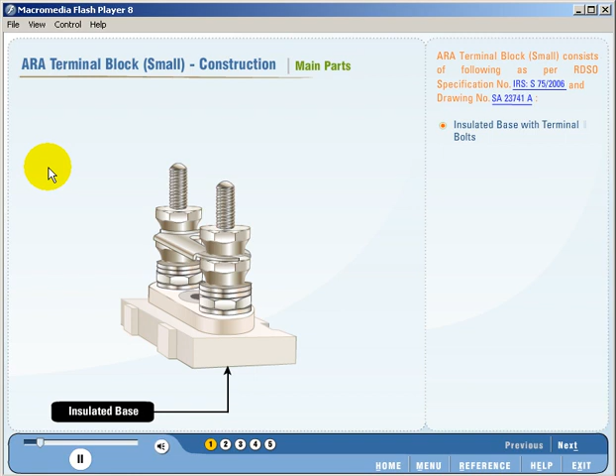ARA terminal block small consists of insulated base with terminal bolts, clamp nut, binding nut, washer and link as per RDSO specification number IRS S75 by 2006 and RDSO drawing number SA 23741A. Click on the menu and select required topic.

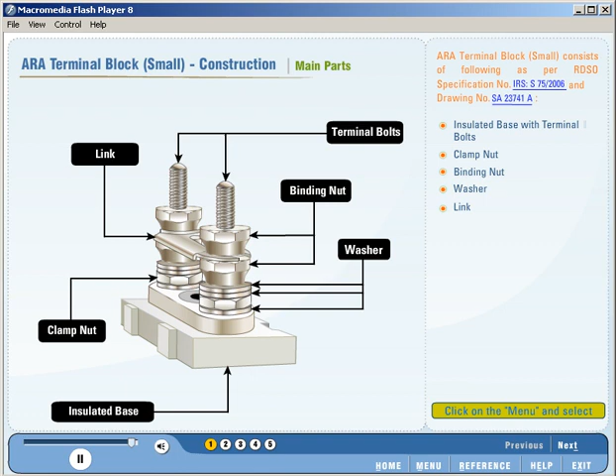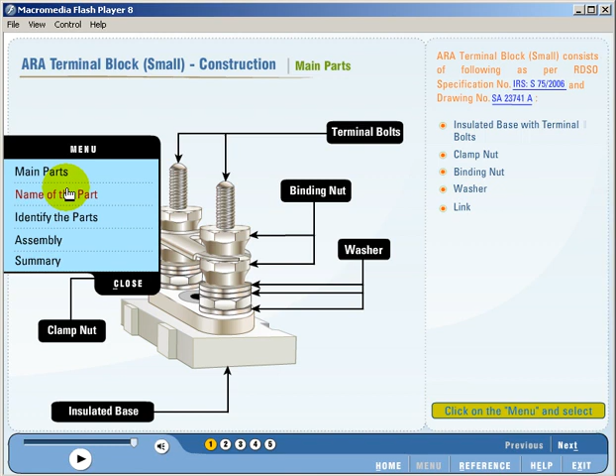Roll your mouse over the components of ARA terminal block to know its name. Click each component for details.

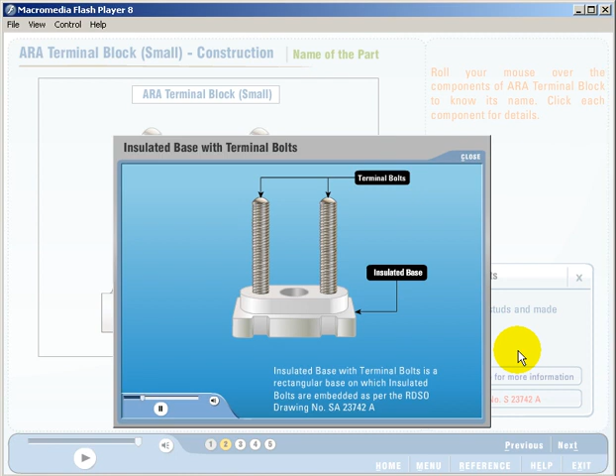Now let us understand in detail about the construction of an insulated base with terminal bolts. Insulated base with terminal bolts is a rectangular base on which insulated bolts are embedded as per RDSO drawing number SA 23742A.

Insulated base is made of glass fiber reinforced with PBT, that is polybutylene terephthalate, for providing insulation between terminal bolts. The insulated base has provision for fixing the base on a board, and provision for locking with adjacent insulated base. The terminal bolts are threaded studs as per RDSO drawing number SA 411 by M, made of brass.

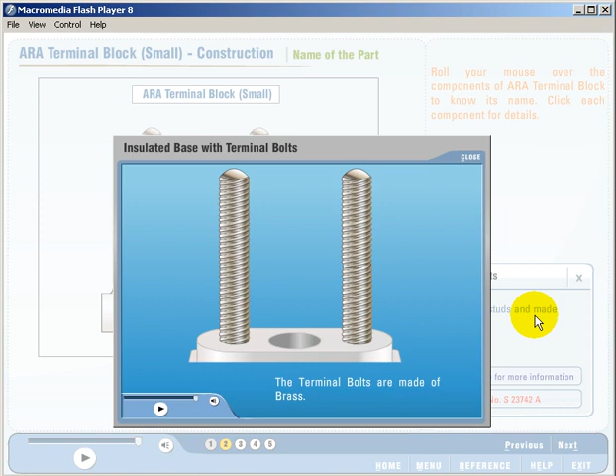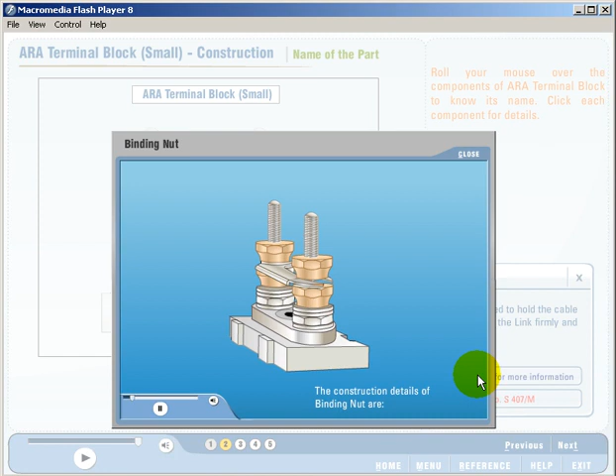Now let us understand the construction of binding nut in detail. Each ARA terminal bolt requires two binding nuts. Binding nuts are used to hold the cable conductor and to hold the link firmly and tightly. These binding nuts are hexagonal in shape and made of brass as per RDSO drawing number S407 by M.

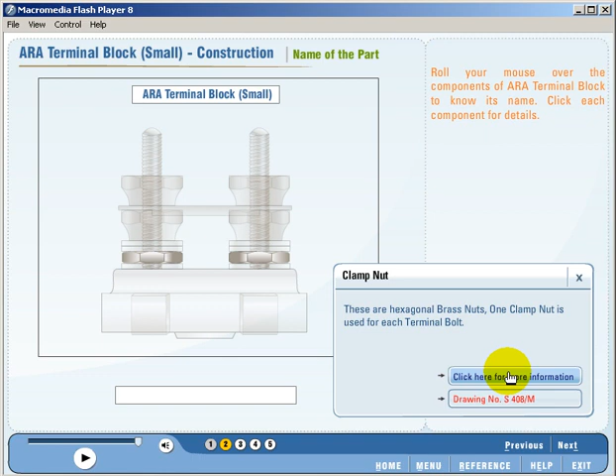Now let us understand in detail about the construction of clamp nut. The purpose of the clamp nut is to clamp the terminal bolt to the insulated base. These are hexagonal brass nuts as per RDSO drawing number S408 by M. One clamp nut is used for each terminal bolt.

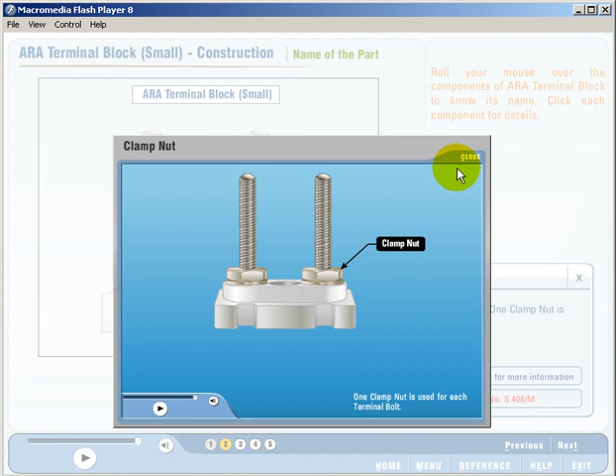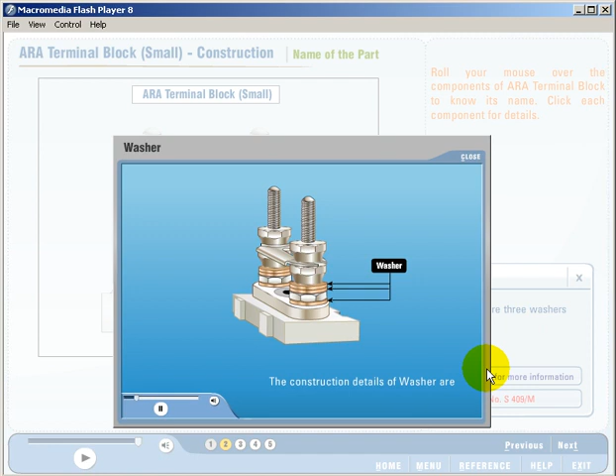Now let us understand the construction of washer in detail. The purpose of the washer is to prevent loosening of nuts due to vibration. The washer is made of brass as per RDSO drawing number S409/M. There are 3 washers for each terminal bolt. Click on the menu and select required topic.

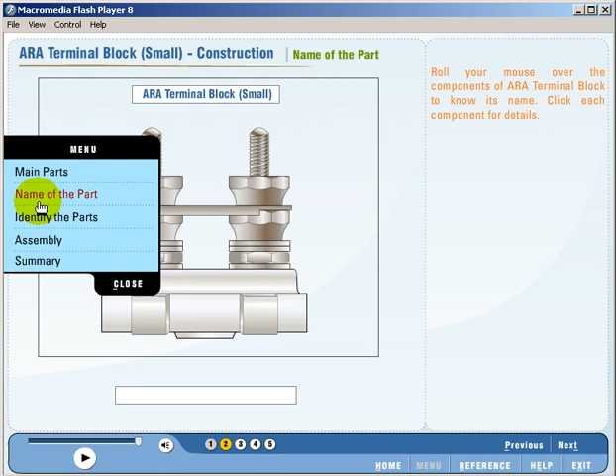The text box at the bottom highlights the label of a component. Roll the mouse over the ARA terminal and click on the correct component to identify it.

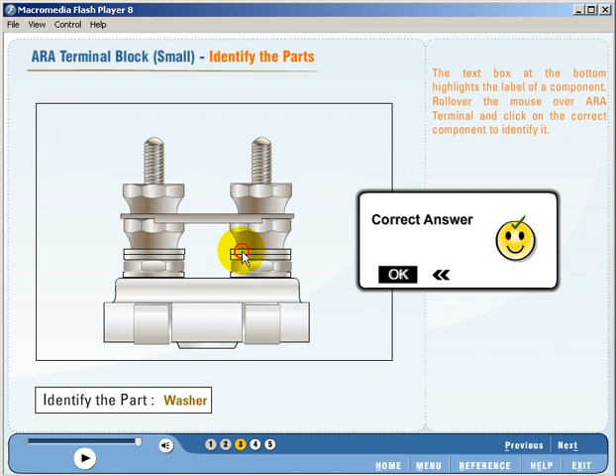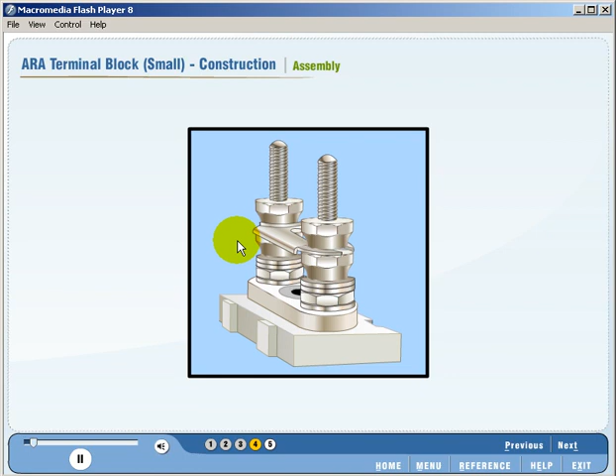Now let us assemble an ARA terminal block small. Firstly, a set of washers is placed on the insulated base with terminal bolts, on which a set of clamp nuts is fixed. Next, one more set of washers is placed followed by the wire. After the wire, a third set of washers is placed.

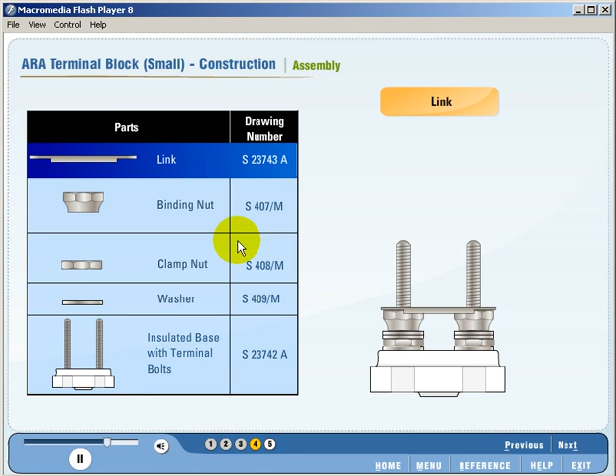All these parts are then bound together by a pair of binding nuts. A link is placed above the binding nuts with the collar of the link facing downwards. Finally, all parts are bound together by another set of binding nuts.